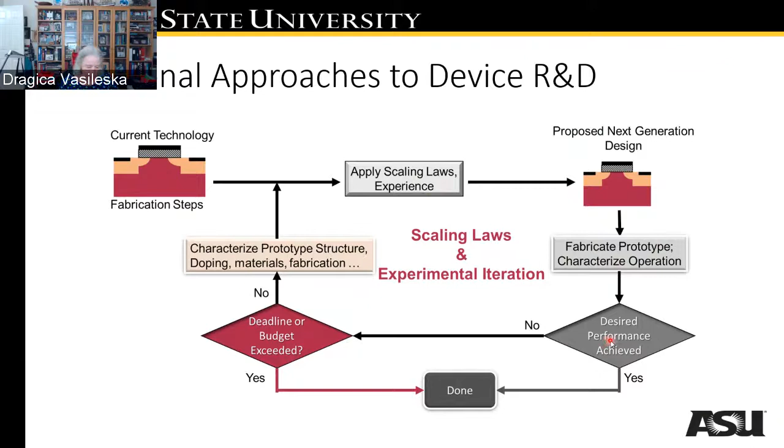If it is not, we have to go and characterize the prototype structure, in particular the doping profile, revise materials, fabrication process, apply scaling laws and our current understanding, and keep on going in this loop until we achieve the desired performance. Now, this is all very fine, but it actually becomes very expensive. So TCAD is considered today as a third mode of investigation in addition to theory and experiment.

And while talking about TCAD, I would like to say some historical facts or perspective related to TCAD. It all started by the seminal work of Scharfetter and Gummel, with which they simulated large signal analysis of a silicon Read diode oscillator. And to analyze the operation of the silicon Read diode oscillator, they solved self-consistently the continuity equations and Poisson equation.

And in these continuity equations, Jp and Jn are the current density expressions, which contain a drift and a diffusion component, therefore drift diffusion model. If one applies finite difference discretization to the drift diffusion model, we can get to the system of linear algebraic equations, which we have to solve simultaneously.

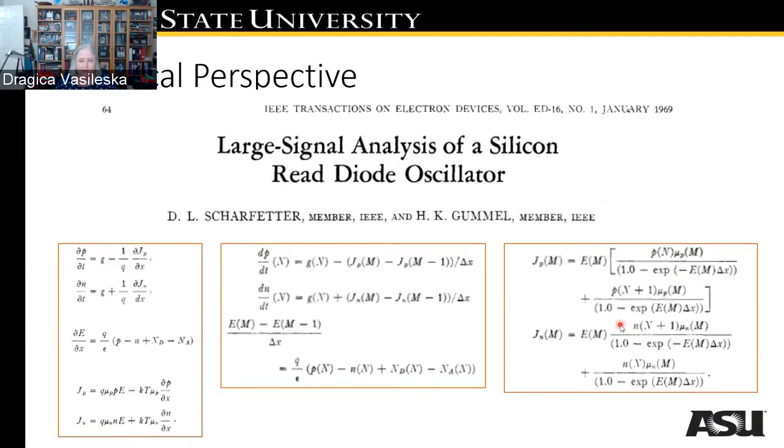That assumption is pretty bad for the discretization of the hole and the electron continuity equations. So in this seminal work, Scharfetter-Gummel introduced what is today known as the Scharfetter-Gummel discretization scheme, which assumes exponential increase of the electron and hole densities between mesh points.

Now, as I said, with the increased complexity of the production of nanoscale devices and their increased cost, it has become too large for any company or country to accept this increased cost for R&D. There is also a demand for shorter process technology life cycles, and there is also emphasis on faster characterization of manufacturing processes that can be assisted by modeling and simulation.

So what are the benefits of modeling and simulation? We can evaluate what-if scenarios very rapidly. Another thing is that we can provide problem diagnostics by providing full field, in-depth physical understanding of what is going on within the structure of interest. And all of this leads to decreasing the design cycle time and shortening the time to market.

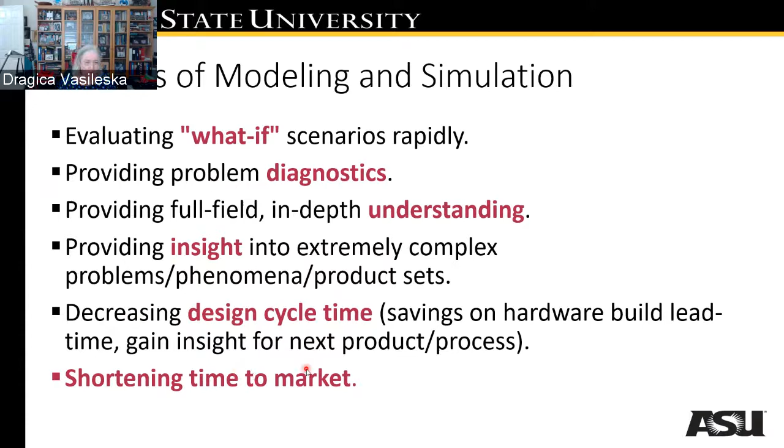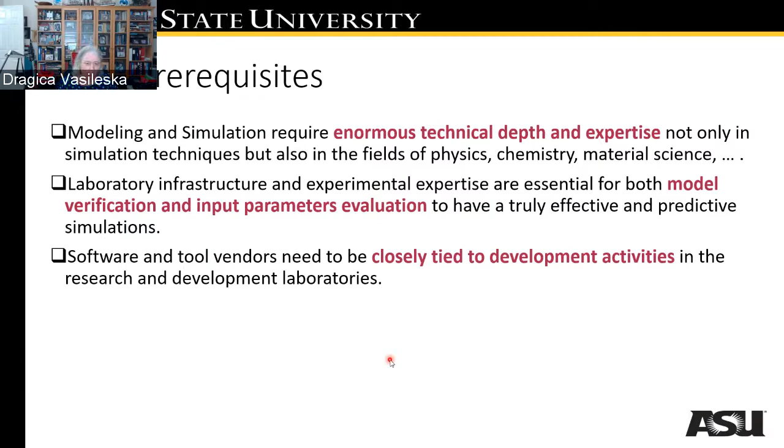TCAD prerequisites are that modeling and simulation requires enormous technical depth and expertise, not only in simulation techniques, but also in fields such as physics, chemistry, material science, I would add mathematics, electrical engineering, etc. Now, in order for simulation modules to be practical, it is necessary to do verification of these models. So therefore, software and tool vendors have to be closely tied to development activities in the research and development laboratories.

Things get further complicated in the nanoscale regime. For example, if we look at devices with channel lengths larger than 200 nanometers, we have classical transport, which is collision dominated. We call that diffusive transport. It is mobility limited, so mobility is a good figure of merit. Below 200 nanometers, velocity overshoot and one-dimensional quantum effects start to dominate the device behavior. Velocity overshoot is an effect in which the carrier velocity reaches values in the channel that are higher than the saturation velocity, and therefore the device exhibits small ballisticity.

Below 100 nanometers, in addition to the velocity overshoot effect and 1D quantum effects, one also has to worry about dopant fluctuations. In other words, because of the stochastic nature of the process of ion implantation, we can have different number and different distribution of the impurity atoms in the active region of the device, which in turn can lead to fluctuation in, for example, threshold voltage, from device to device fabricated on the same chip.

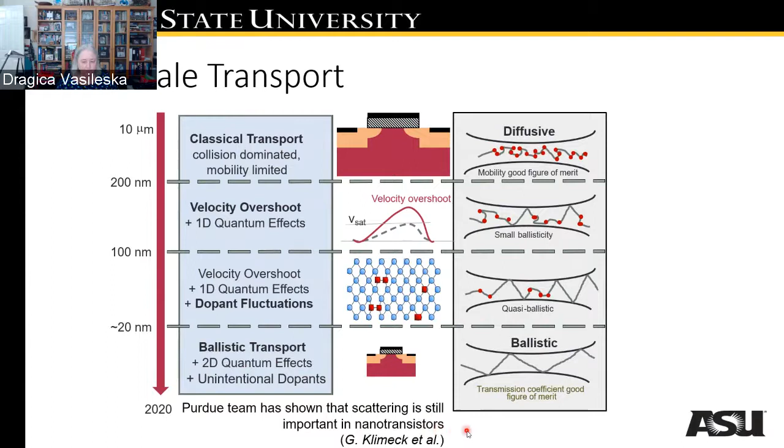Below 20 nanometers, we have significant evidence of ballistic transport, two-dimensional quantum effects, and also unintentional dopants can play a significant role in, for example, affecting the magnitude of the on current, depending where we have those unintentional dopants. I would also like to say here that in the ballistic regime, the transmission coefficient becomes a good figure of merit. Now, the Purdue team has shown that scattering is still important in nanotransistors. So any model of nanotransistors has to take into account scattering.

Now, a special case of technology computer-aided design is computational electronics, which focuses primarily on three things: process simulation, device simulation, and some levels of circuit simulation. Of course, as I said, all of that has to be tied to experiments, which, for example, for process simulation, would give the SIMS doping profiles or the TEM structure of the device. Process simulation gives the device geometry and the doping profiles to the device simulation module, which is verified by IV/CV or, for optical devices, quantum efficiency experimental data.

And the device simulation leads to device electrical behavior characterization, which is next given to many levels of circuit simulation. If the circuit doesn't perform as we want it to perform, we go back to the process simulation, do the device simulation and circuit simulation until we achieve the desired performance.

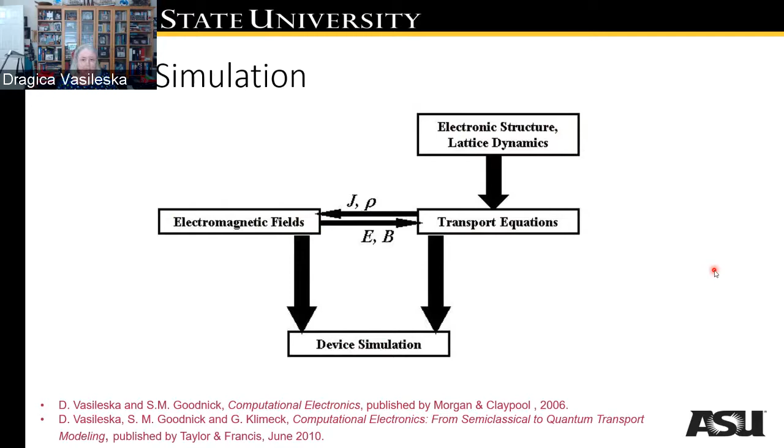The classical models are the ones I already discussed: drift diffusion, energy balance, which is a special case of a more general hydrodynamic model, and the Boltzmann transport equation for direct solution of the Boltzmann equation. In terms of quantum modeling, at the lowest level of sophistication, we have transfer matrix methods. Then we have density matrix and Wigner function, and most complicated are the NEGF methods for device simulations. If we're dealing with microwave or optoelectronic applications, we have to substitute Poisson's equation with Maxwell's equations.

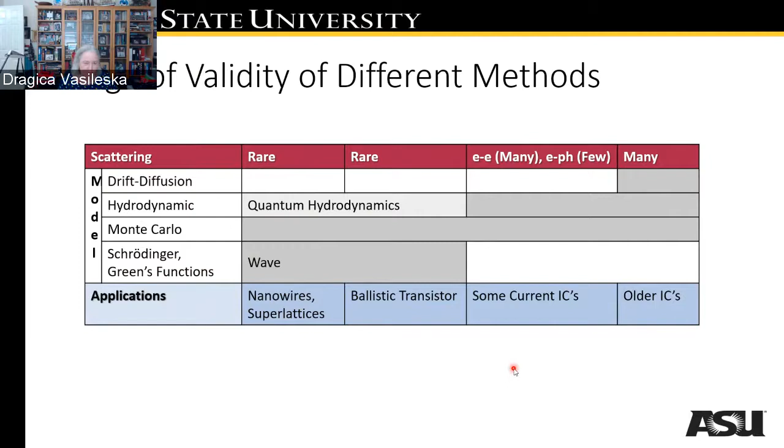So let me now switch gears and talk a little bit about the challenges and the solutions to TCAD. I have extracted several examples which I think really represent challenges to TCAD, and they are in the focus of scientific research. One of them is multi-scale modeling of gallium nitride device reliability. That involves different time scales, and it also involves different length scales.

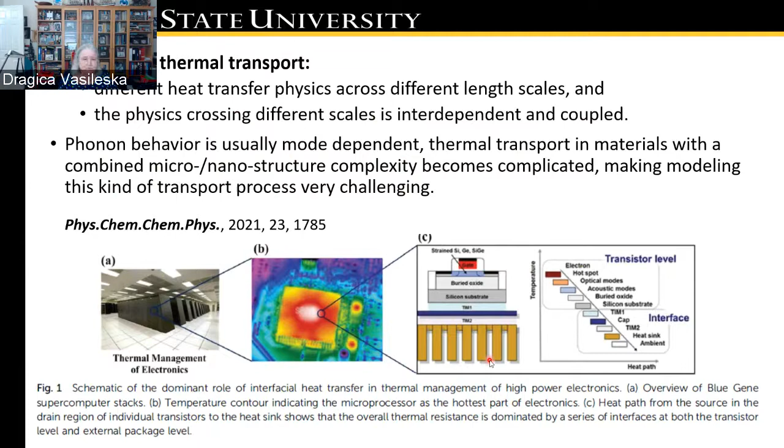Another challenge to TCAD is modeling of ultra nanoscale transistors. I already talked about that we need new materials and devices to continue the performance scaling. And to study new materials, it is necessary to use ab initio calculations, which will provide the proper band structure of the material from where we can extract the effective masses and the band gaps.

It also provides the density of states function, which determines the strength of the scattering mechanisms within the device, and it also provides the scattering potentials or the matrix elements for the scattering mechanisms relevant for such material system.

What are the challenges to TCAD? First principle calculations are very complicated. However, there are certain properties that can be calculated effectively with these ab initio calculations, such as electronic properties, structural properties, mechanical properties, dielectric, spectroscopic, and dynamical properties.

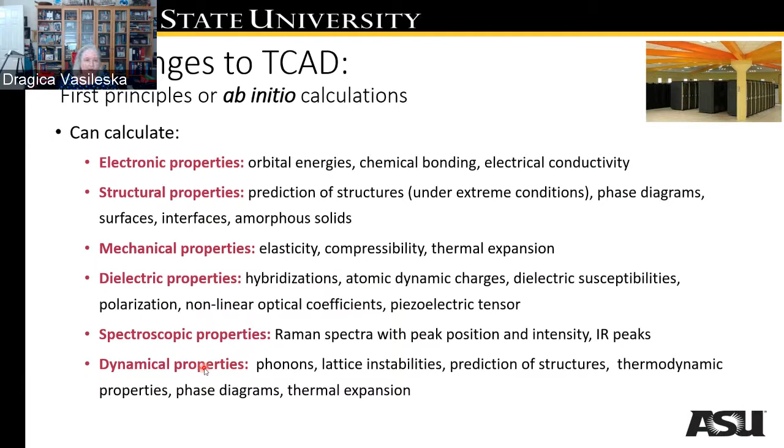What is hard to calculate is the transport properties such as thermal conductivity, electrical conductivity of semiconductors and insulators, and the diffusion. What is really difficult to calculate is the excited electronic states, which define the optical spectra. So if one is interested in using first principle ab initio calculations, one needs to get an ab initio code and get an account on a supercomputer to run the experiments.

Now, back to the ultra nanoscale devices and memories, there have been also some solutions to TCAD. For example, the Purdue team has developed an atomistic mode space approach for modeling of realistically large nanowire transistors, whereas the group from ETH in Zurich has coupled ab initio and NEGF calculations to model ReRAM.

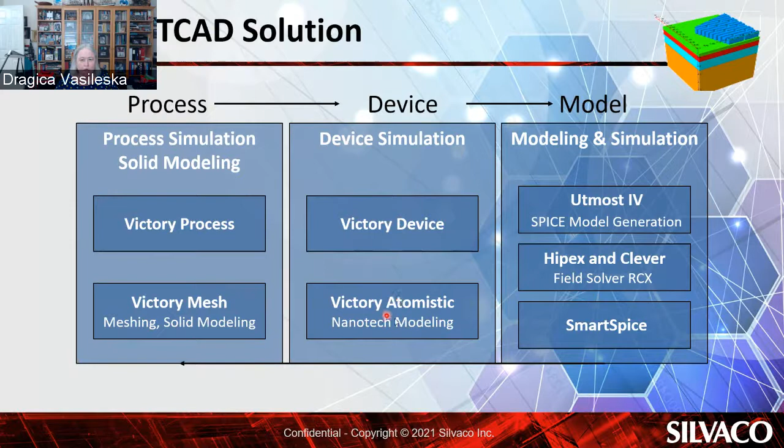Now, I have collaborated with Silvaco for over 20 years, so I was able to get some slides from them. This first slide describes their new platform, Victory TCAD, that consists of 3 general modules: process, device, and a circuit level module. The process simulation and the solid modeling has Victory Process and Victory Mesh modules. Victory Mesh does meshing and solid modeling. The device simulation includes Victory Device and Victory Atomistic, which allows nanoscale modeling.

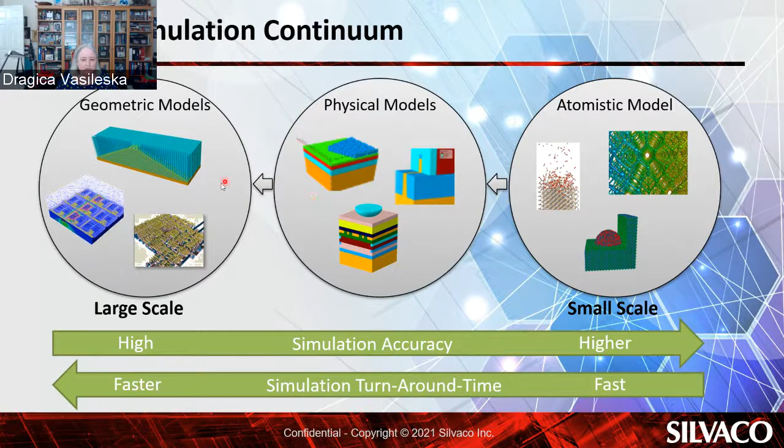Now, to simulate semiconductor devices, and that is done within Silvaco and other TCAD tools, one has to start from small scale, feed these results from atomistic models into physical models, which then feed these results into geometric models.

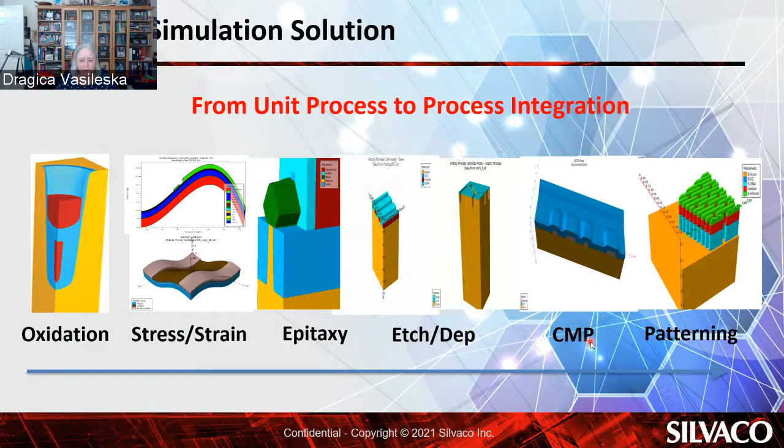In terms of the process simulation solutions within Silvaco, there is a lot of development on the process of oxidation, stress, and strains, which are very important in ultra nanoscale devices, the process of epitaxy, etching, deposition, chemical mechanical planarization, and patterning. In terms of the device simulation solutions, they have provided also software from atomistic to large scale, which can address modeling of displays, power devices, optical, radiation, advanced CMOS, and memory devices.

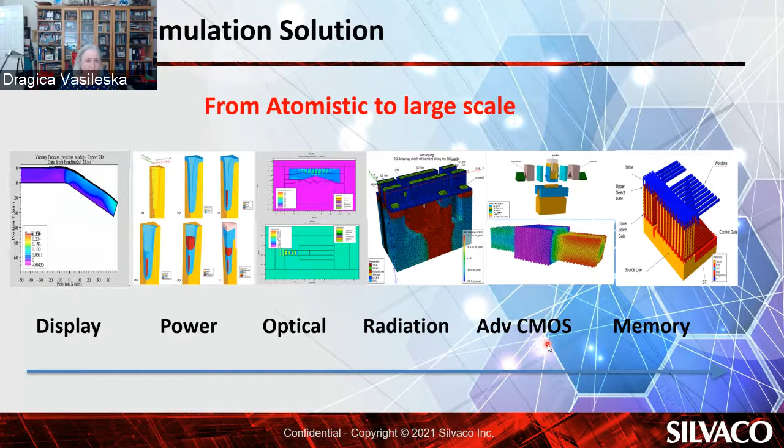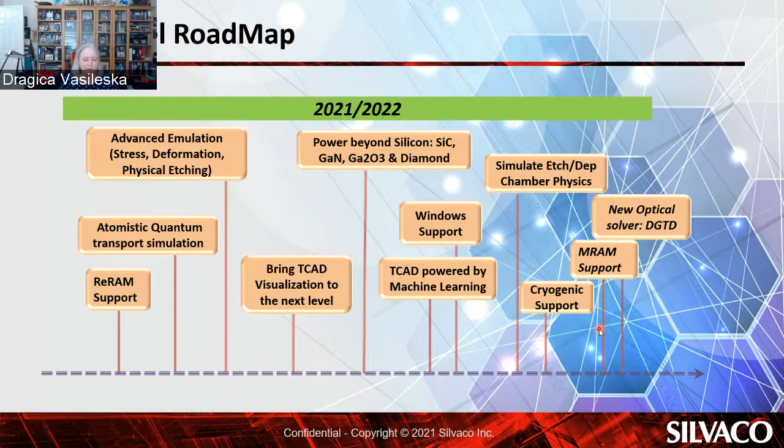New optical solvers are predicted, MRAM support, and what is also very important and trendy at this point is cryogenic support, so cryogenic temperature modeling. And that is, I would say, a very hard problem from a computational viewpoint, because instead of the normal Maxwell-Boltzmann statistics that is applicable to most devices at room temperature, we have to deal with Fermi-Dirac statistics, quantum effects, and things are basically behaving very badly in terms of numerical convergence. The problem becomes mathematically ill-conditioned.

We can also look for simulation software in the public domain, and one example of that is nanoHUB. nanoHUB was developed as a science gateway as part of the NSF-funded Network for Computational Nanotechnology. It is being used by approximately 1.9 million annual visitors, out of which we typically have about 23,000 simulation users a year.

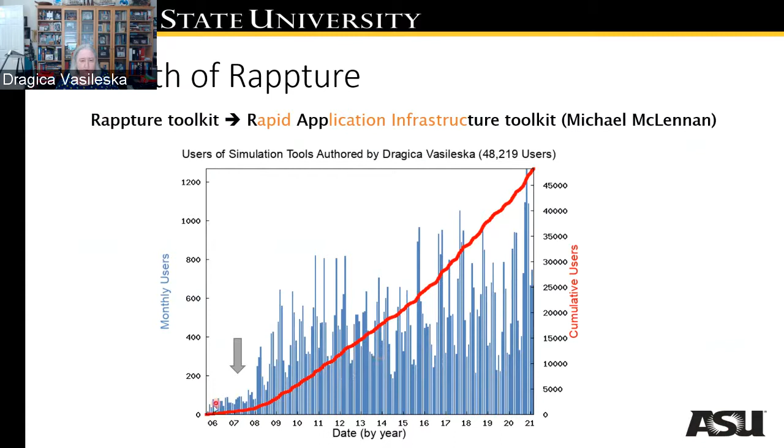Now, what made nanoHUB so attractive? Rappture Toolkit. Rappture Toolkit was developed somewhere between 2006 and 2007, and it allowed high-end and non-user-friendly simulation software to be packaged within a nice, user-friendly graphical user interface, which can then be used by non-experts. On this figure, you can see that the cumulative usage of tools that I have co-authored on nanoHUB started to have an exponential growth after the introduction of Rappture.

Now, what does nanoHUB provide in terms of simulation software? We can have access to ab initio free software such as ABINIT, SIESTA, Quantum ESPRESSO, molecular dynamics software for nanomaterials, which does coarse-grained molecular dynamics, Band Structure Lab as part of the band structure software, and in terms of device transport models, we have PADRE-based TCAD Lab, whose back end is the PADRE drift-diffusion software, nanoMOS, which allows ballistic transport in nanoscale devices, OMEN and its successor NEMO5, which allow full-band non-equilibrium Green's function modeling of nanotransistors.

Here we have CNTFET and other non-standard simulation software, for example, for analytic spin precession simulation, nano heat flow, memristors, etc. There is also access to some circuit simulation software.

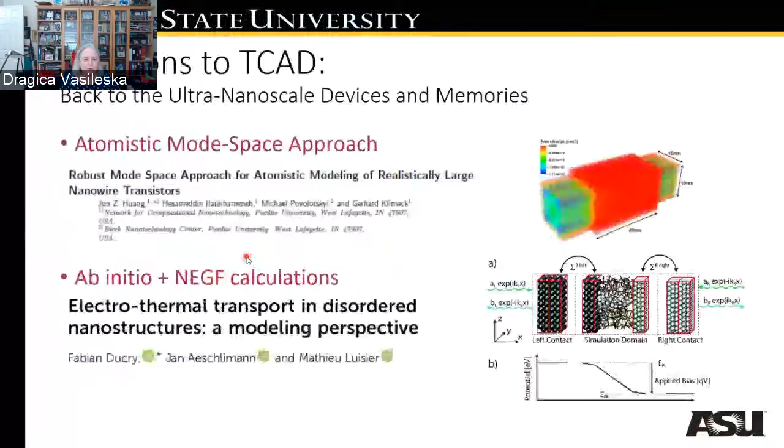So the first question is about the gallium nitride device. Can realistic defect structures be taken into account, and related effects such as inhomogeneous heating caused by the defects? There is some work in this area, but I would like to stress here, if I go back to this slide, that it is a very hard computational problem because it involves a variety of length scales. And defects by default are very difficult to treat. So I would say that there are some prospects of modeling these effects, but they are in their infancy.

For example, we have done modeling. I would like to add to that within our group at Arizona State University, we have done modeling of point defects in cadmium telluride solar cells, and modeling of grain boundaries is already a big problem. These are all 2D, 3D problems where you have to do conformal mapping, because as defects move, the interfaces change, the structure of the defect changes. It is a very complicated problem.

And also about the inhomogeneous heating, is that something that can be accounted for? Yes, inhomogeneous heating can be accounted for if you couple, for example, we do it with a Monte Carlo simulation coupled with energy balance solvers for the acoustic and optical phonons that can take care of inhomogeneous heating at the device level. One has to also worry about a more global level, for example, how heat goes into the package and how heat dissipates through the contacts. But that is all possible, of course, with some level of accuracy.